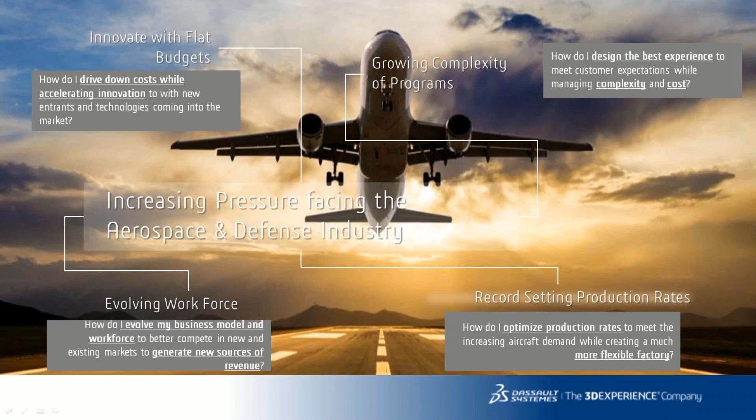And the budgets are usually flat to invest into new technologies, new production systems, which has a real impact to your future. So when we look at the factory of the future and the manufacturing side of it...

There was a lot of talk about production rate over the past years, but it's really more like what we see, it's about the flexibility. It's about the flexibility on production rate, because your rate is depending on the demand, it's depending on the mix of your programs, it's depending on how you want to produce in the future.

You want to have still dedicated production lines, or you want to produce multiple aircraft on the same line. So this all plays into the flexibility which is needed in the future to set up and run your production environment.

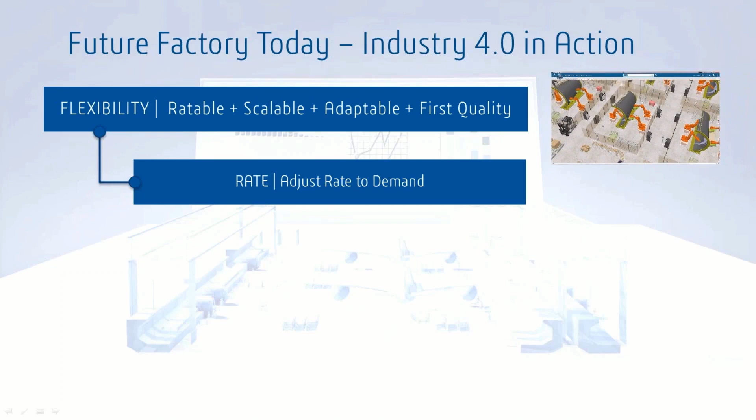Secondly, it's quality. And quality is one of the largest impacts to your production, to your capacity, to your committed date to deliver at the end.

And the quality is not only impacted by human beings working on the shop floor, but the entire system, the availability of parts and the help we can give to the workers on the shop floor to produce better quality the first time.

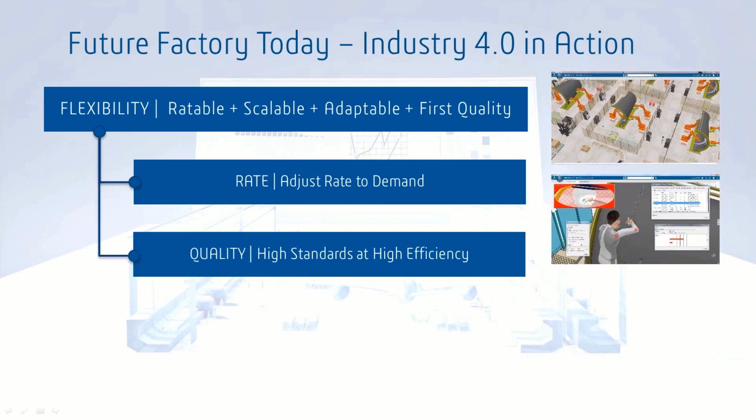Last but not least, globalization. Globalization is a large aspect, starting from your supply chain, which is very, very important to meet your other goals, but also to look at your own production sites.

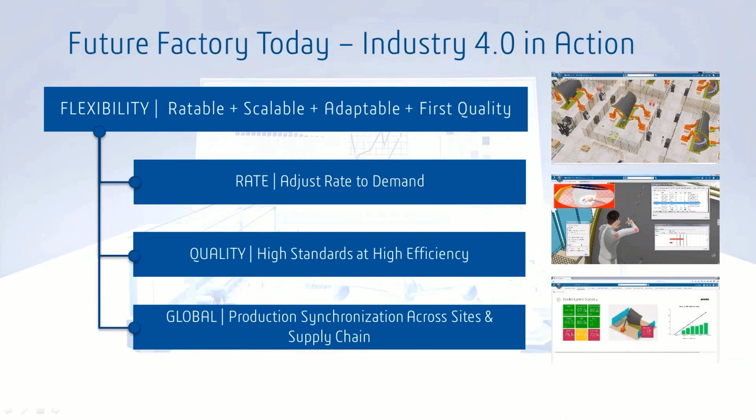It's not that it's only one. It is usually multiple production sites, and those production sites are spread across the continent or even around the world. And the synchronization of those production sites along your supply chain is very key to achieve your goals and the flexibility in that global system and network.

So we said there's a race, a manufacturing race, and you can see that almost all the governments around the world are heavily investing into the manufacturing of the future. All do it a little bit different, but at the end, it all comes to four major pieces they support and they want to research, develop, and get into a stage where it's really leverageable in your production environment.

First is the digital continuity. It's really the underlying data stream along your value streams, from engineering, design, manufacturing, execution, support, and services.

Secondly is the vertical integration and the network of your different sites, your different resources. It's not that you will get the most benefit of focusing on one site and doing something totally different on another site. It's really, how do I evolve a factory of the future network throughout your entire production site.

Then the next step of connecting the smart factory - let the resource learn from each other. Once we establish this continuity, the deployment of the future factory to all your different sites, then let them learn from each other. Let's see how we can drive the factory to continuously improve it.

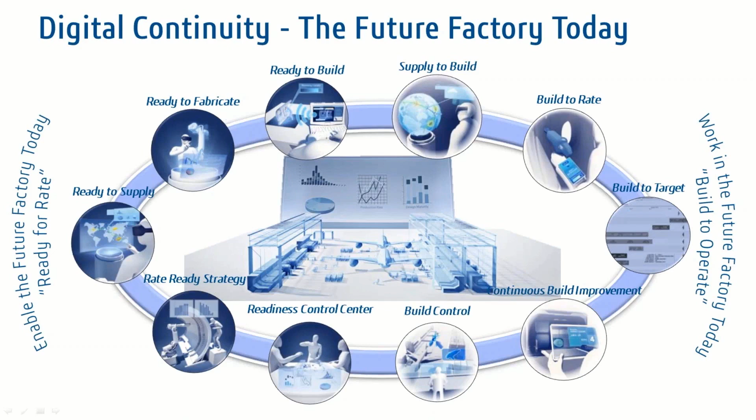To get this data, we have to be able to connect to the real world. And this connection can be to a machine, an RFID tag, GPS data, scanners, or the HoloLens when someone is using it for executing work. But it is key and important that once you go in that direction, you start collecting that data and make it available almost in real time so that you can harvest it and drive your optimization, your intelligence, and do that loop of optimization throughout your value streams.

This is a kind of summary slide of what I just said. You can pause here for a minute and read through. But again, when we talk in the next parts about technologies and how they can be leveraged for the factory of the future, the digital thread and the 3D experience twin of your production environment is key and essential to connect those dots, connect those technologies, and really leverage that rich data in the future.

So let me take you to Germany, because I'm based in Germany. I like to drive on the Autobahn, but sometimes we have construction sites there, and usually a construction site comes with a short on-ramp. Traffic is still flowing very fast, and you have a hard time getting on the Autobahn. Either you stop and pause and wait for a long time, or that's one of the highest risks of accidents, when someone is pushing in there.

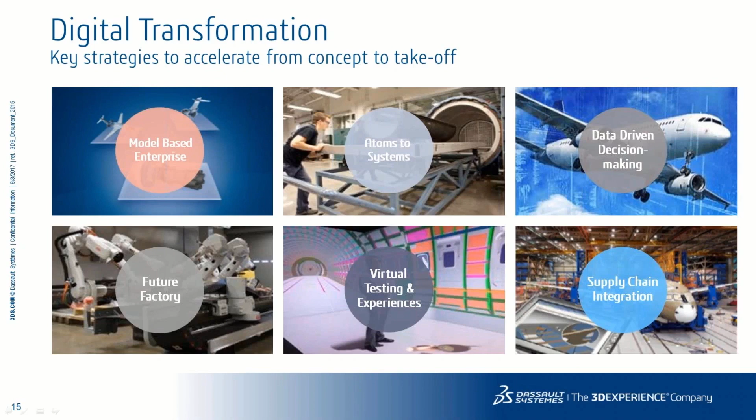So what is this 3D Experience Network about? There's a digital transformation going on, and this started a couple of years ago. It's not something new when we think about model-based enterprise, 3D design, model-based definition data, and how this can be leveraged. But there are more things which can be developed further and will drive efficiency.

When you look not only at the factory of the future, but also the end-to-end process, based on an assessment we did, we see there's potential to cut 50% from the concept of an aircraft to the system takeoff. We've demonstrated that with different projects and customers, getting from the idea to the first takeoff or first prototype and concept design in less than 90 days. This is the first indicator of how far we can go leveraging these new technologies and innovations.

So where can we bring this future into reality? I mentioned one site in North America, the 3D Experience Center at WSU NIAR in Wichita, and the second one is the 3D Experience Center in Hamburg, Germany. I'd like to show you a short video introducing the concept behind both sites.

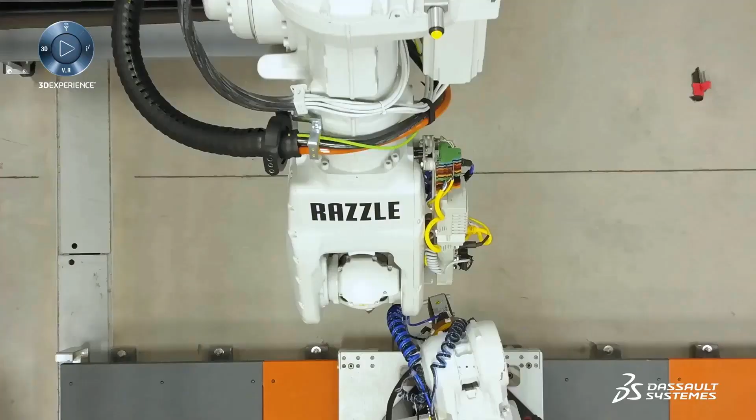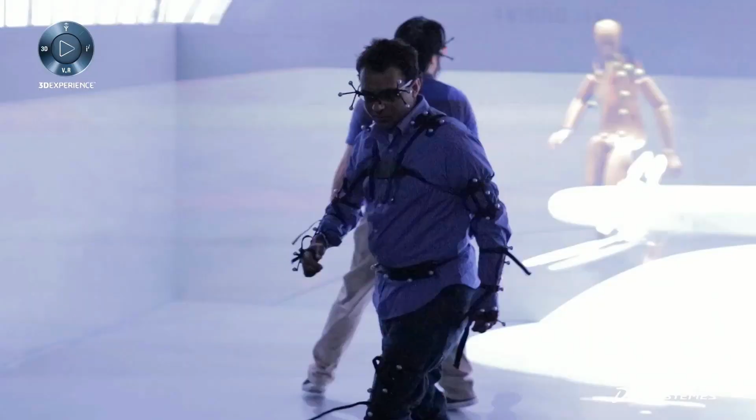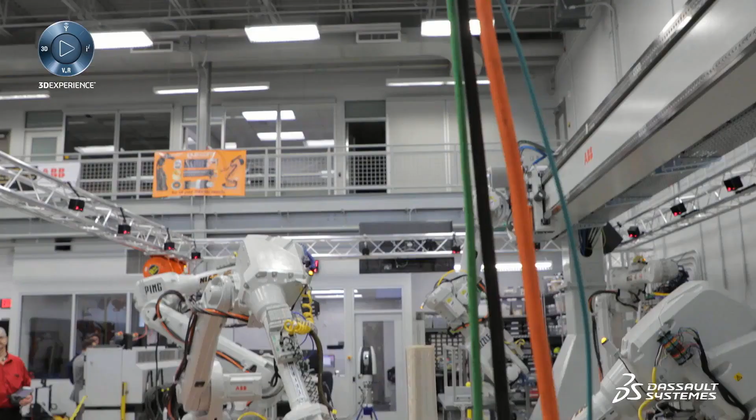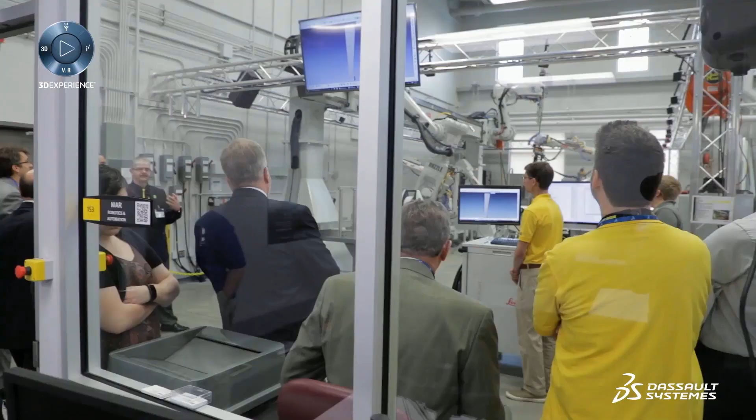We developed the 3D Experience Center for various reasons. The sophistication, both in terms of processes, technology, mechanism, and system of work, is quickly accelerating. Our customers need a place where they can innovate, experiment, and develop new ways of working and interacting with this technology, and how that technology would fit into their space and existing processes. This facility, although physical, is connected globally.

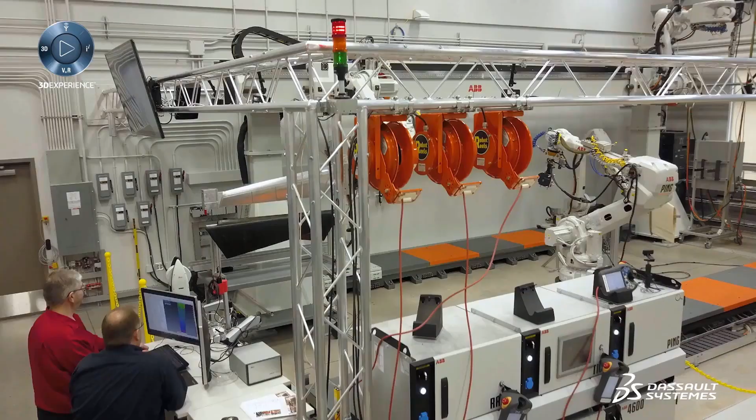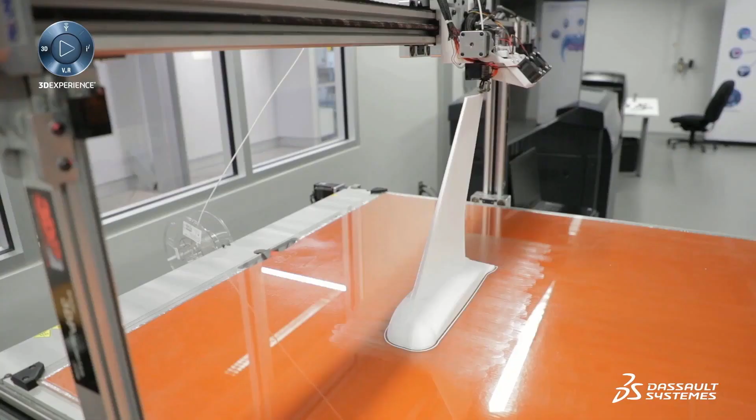Our 3D Experience platform is cloud-based. Teams working physically here can be virtually connected with colleagues around the world and other experts or partners that need to be brought in. We now have the opportunity to drive innovation throughout the world, because our mission is to create an innovation ecosystem where companies can take advantage of this capability wherever they are, whether in Asia, Europe, or the United States. We have a whole roadmap and strategy to develop this innovation ecosystem.

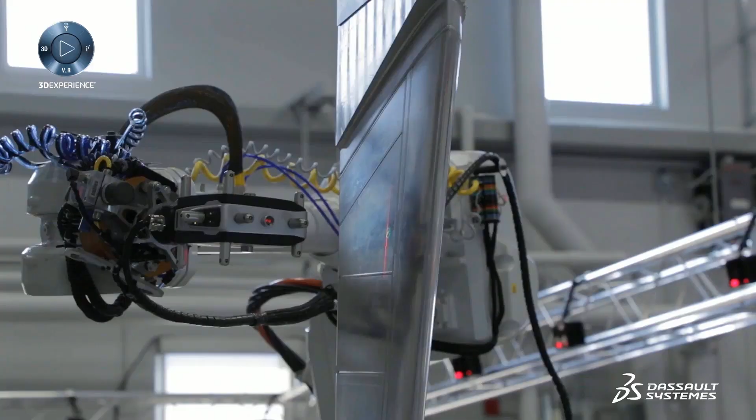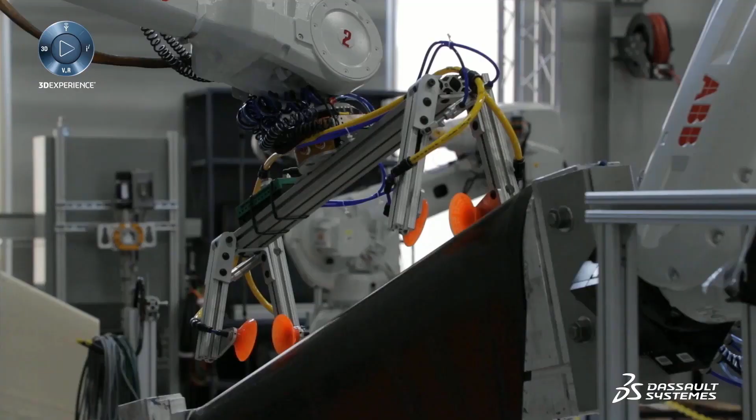If you're a startup and you come to the 3D Experience Center and leverage all the technologies, processes, system of work, methods, rules, templates, and expertise, and take a customer out of their comfort zone and bring them into this kind of environment, we can change their mindset to allow them to accomplish their dreams.

The factory of the future will be human-centric. I believe in the future more and more people will want very suitable solutions and experiences—not just more of the same object, but differentiation. So human-centric on all aspects: quality of work, quality of the result, and quality of imagination, for people to become true makers of great things for society.

With all the experience, all the knowledge, and all the partners in an environment like an experience center, we project that we can drive this cost down, and by this, accelerate getting new technologies to a TRL 6, where you can take it out of the lab and deploy it on your production site.

So what are the objectives of the experience centers we established with our partners? The objective is that you go and perform your own research, your own definition of your factory of the future. You can test, visualize a strategy and the processes, and use all the new innovative technologies available in those 3D experience centers.

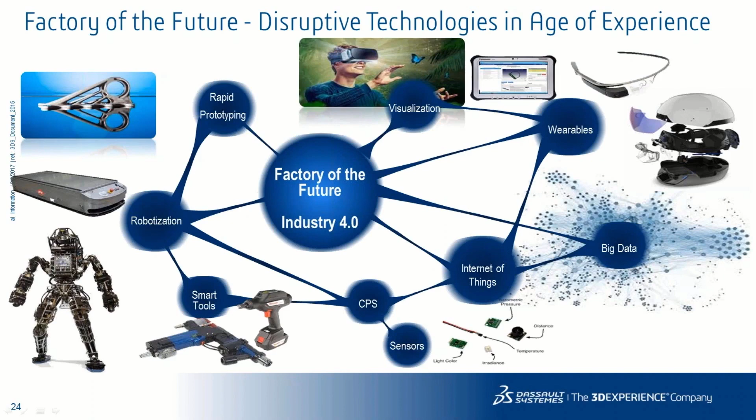How can you imagine it? I have here the 3D layout of the NIAR Innovation Center, or 3D Experience Center, where we have a large setup of immersive technologies. There's the largest cave, the robotics MRAM, the multi-robotics advanced manufacturing cell, which is the largest of its kind, and a large center of 3D printing capabilities.

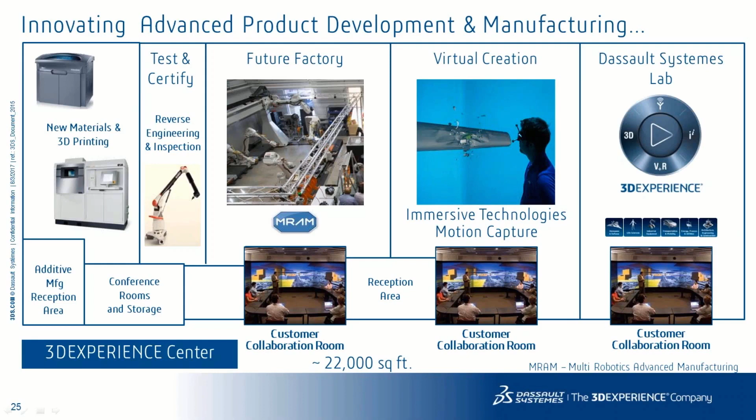And then for you and us to work together on projects in collaboration rooms where you can really test drive it. You can come with a project with some innovative ideas, go there and leverage all the technology which is there. In part 2 of this webinar, I will provide more details on those different capabilities and what you can expect.

So in summary for part 1 of the webinar: transform your strategy and your vision of innovation into reality in these experience centers. This is really the key behind those centers we set up.

Leverage the ecosystem during this transformation. It's not only you, it's not only us, it's not only partners, it is really the network of different companies, individuals who run those centers and can be connected, or should be connected, to be faster and smarter.

Use it as a prototype and create a blueprint, get this environment to a level where you are really feeling confident that you can put it into production. Do it faster, do it cheaper, and then take it out of those centers and put it into your production.

And use it to create your next generation of workforce. We started in those centers to collaborate with universities, the same in Wichita as well as in Hamburg, to educate students, but you can also educate your next generation workforce. Remember this was one of the chapters of what we think is key in the future: that the human is still there, and you have to take the human on the journey into your factory of the future. Those are places where you can take them and educate them, or just let them go with you together on that way to the factory of the future.